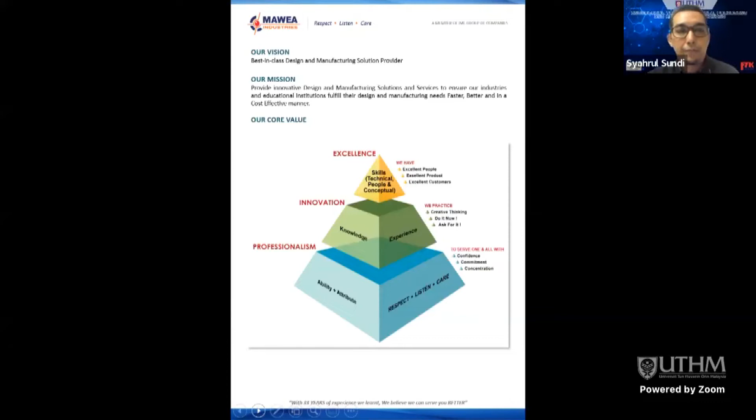So basically this is a rough explanation, a rough briefing about MAWEA Industries.

If you look at the Dassault Systemes partnership in Malaysia, there are a few, another two companies if I'm not mistaken. The difference between MAWEA or IME group and the other two is the appointment of the partnership based on Dassault Systemes, and MAWEA or IME group has held this since 2013.

So that's why even I myself have been dealing with MAWEA for a few years, especially when we have direct programs with MAWEA or with the worldwide company, we also deal with IME. Alright, so that is a brief about the company.

So basically all this solution we can actually browse through Dassault Systemes solution website. So this is the main product, I would say, of CATIA, MAWEA or IME group of companies.

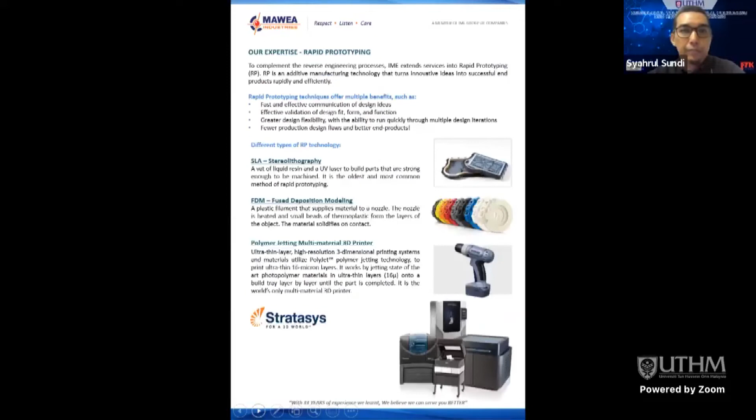Okay, so for today I would like to introduce myself just a little bit, what has been introduced by Mr. Chairperson earlier. So in other words, I'm also a lecturer, one of the faculty at UTeM, FTK-MP, more or less like FTK UTHM.

So more towards engineering technologies, involved in machining and CAD/CAM for the past 11-12 years before this. So alhamdulillah, with this collaboration, hopefully we can have further collaboration later on with FTK UTHM. Alright, just a brief about the topic.

Dr. Khairul mentioned earlier, I won't just go for lecturing, more or less like a sharing. I would say it's more towards sharing. So what we're gonna see.

The real industry experience that I have gained so far, hopefully can boost and inspire some of the students at UTHM to continue their motivation to keep learning, because what we have in the current situation in Malaysia is we are in the implementation, I would say, executor role.

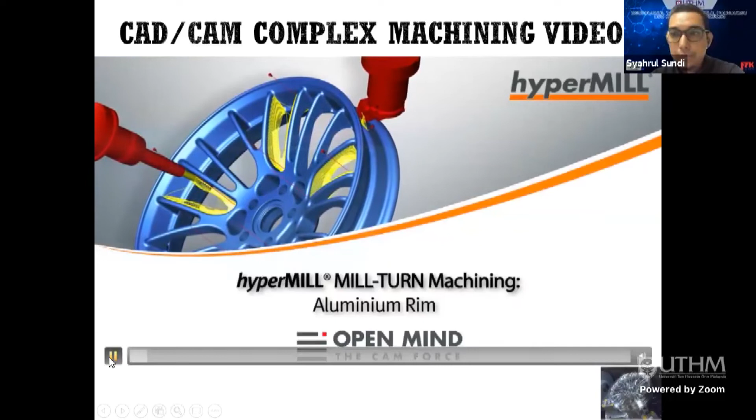Alright, I would like to start with a simple video. Can you hear the sound? Alright, so this is an application of CAD/CAM nowadays, how complex the design can be realistically proven in machining. So let's watch together.

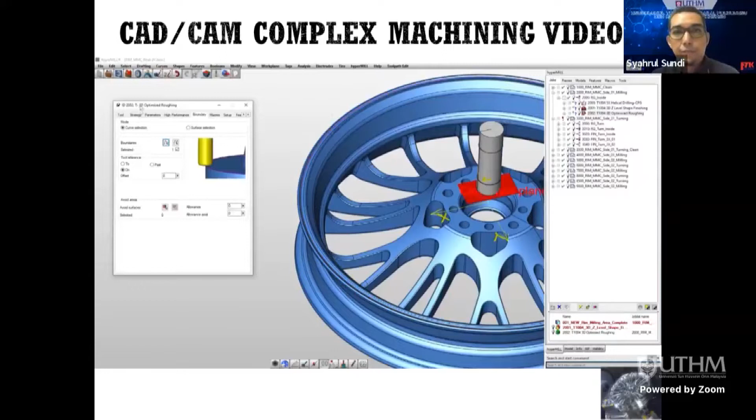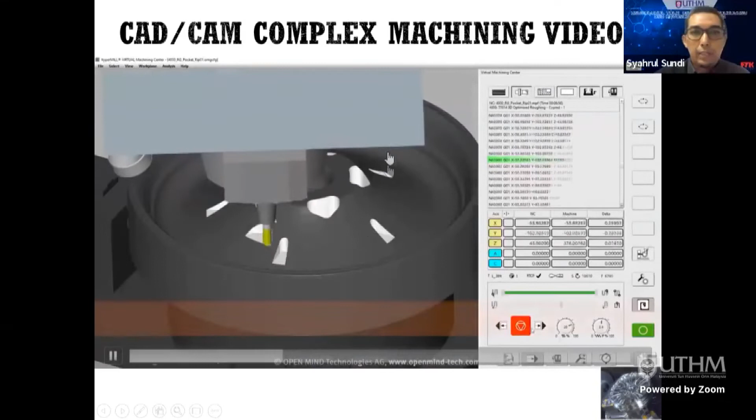He's doing turning now, turning before the 5-axis simultaneous comes in. In turning position, still doing turning with the main spindle which has a turning tool. We're going to the turning control. Right now it's going to proceed with the milling. This is the milling process. And this is simultaneous 5-axis.

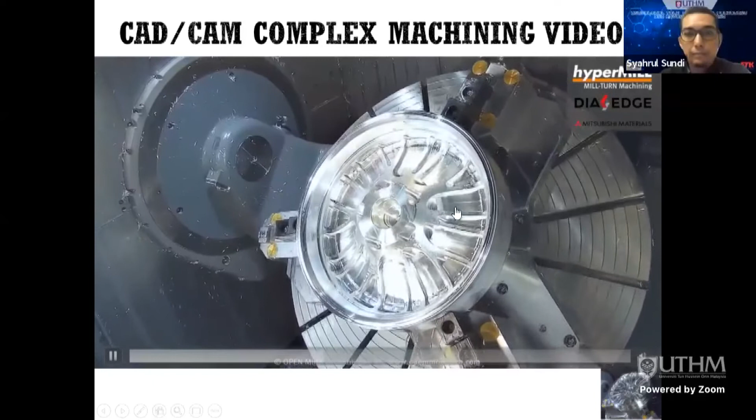Alright, so this is all the G-codes read by the controller. So the controller says okay, this is more or less like semi-finish, and then turn it around for the second pitch on the back side.

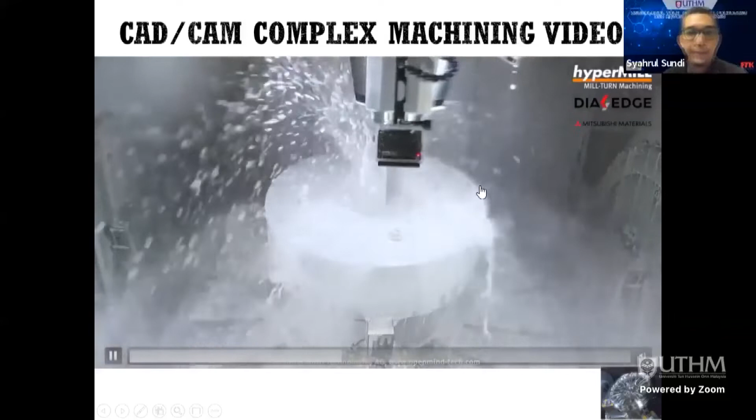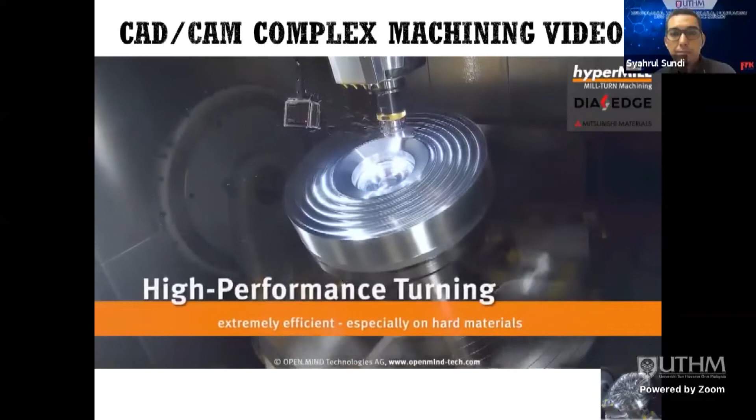Okay, high performance turning. So this is not simple, this is a complex machine. So this is high speed machining of turning on one outside.

Alright, so for those in machining, whoever has a soul for machining, basically we can actually appreciate the beauty of machining this part. It's not easy to machine this complex part. This is the reason why I'm showing this one. Later on I will try to share and explain.

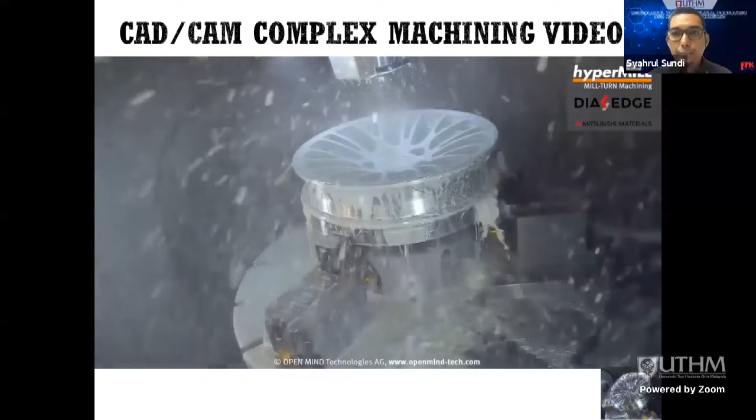Okay, so it's starting to match with the other side. So let's look at the setup and everything. If we set up wrong, it's going to be a total waste of this part. That's why the cutting technology and the cutting planning is very important. Not just on the CAD and CAM alone, but we have to have everything in place before we can proceed with the final machining.

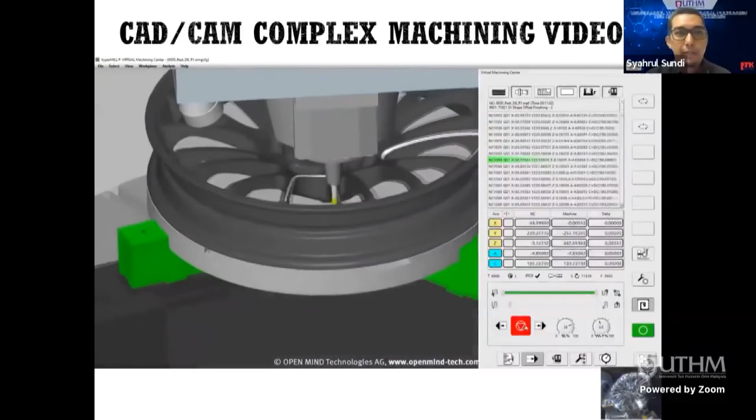This is 3 axis simultaneous turning. Turning, we know, has 2 axes, X and Z. So there's simultaneous turning there. This is 5 axis simultaneous motion. So how can we translate that into real machining? That is the current technology available, which is very important. We have to absorb this kind of technology so that we keep up with the industry.

This is the final part. Gila.

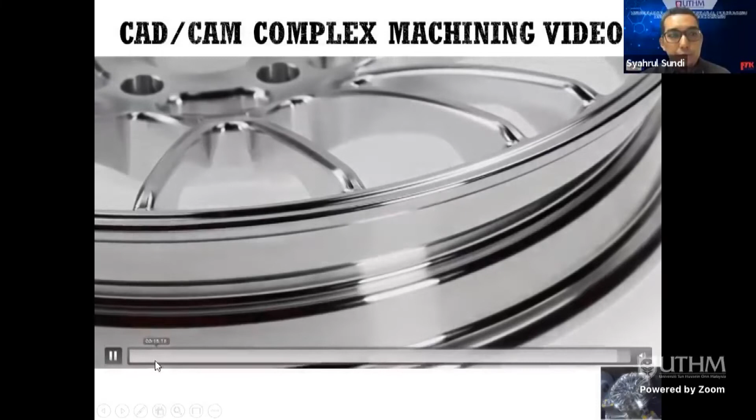Alright, so that will be our brief intro on how CAD/CAM complex machining is involved in the current industry. That is a part of OpenMind, one of the software solutions in the world that's famous, right? OpenMind or hyperMILL is their software.

Okay, let us slowly dive through a little bit - we call this the boring part, but let's go through it a little so later on we can look here and there. Just a sharing from me, so it can help a bit to see the reality out there.

So basically, the CAD system nowadays is very important. No matter what, everything is already involved in CAD. If you really go outside there, we no longer do direct brainstorming with 2D drawings. Most companies out there already use 3D for brainstorming, and it's very important to get to know the CAD system - whatever CAD system you have, the tool is just a tool.

Whether you have SolidWorks in-house, or Inventor, or Catia, there are various software names out there - that's not a problem. The most important thing is how we manipulate, how you can actually use the tool you have to propose or to design, to create a good design. So from the design stage, CAD is very important.

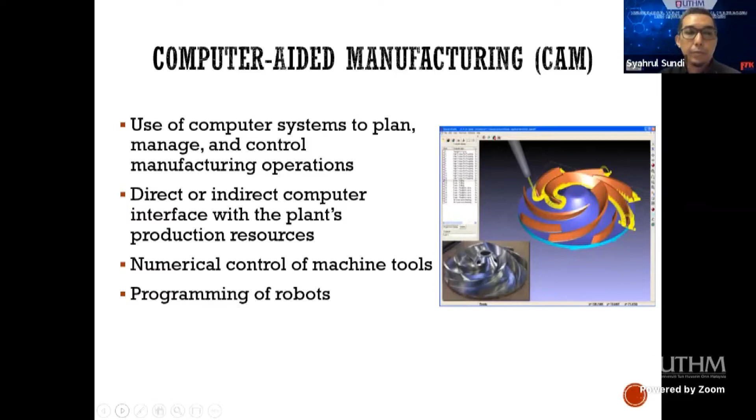So basically kalau kita tengok kat sini, the latest 3D experience product, a new product from Dassault Systèmes, you can have system engineering simulation. So before you do the mock-up atau membuat prototype, semua the system can be embed into the software. So bila buat for example kereta punya simulation, we can actually know from the software itself. So that's how powerful the software nowadays.

Even before this, we have listened to speaker number 1 tadi, Cik Mazlan, also related to CFD, computational fluid dynamics. So it depends on the simulation before you can go into the reality, or else you will actually incur a lot of costs. That's why simulation is very important nowadays. But then the validity, the validation of data from the simulation nowadays is very helpful lah dalam buat certain punya product.

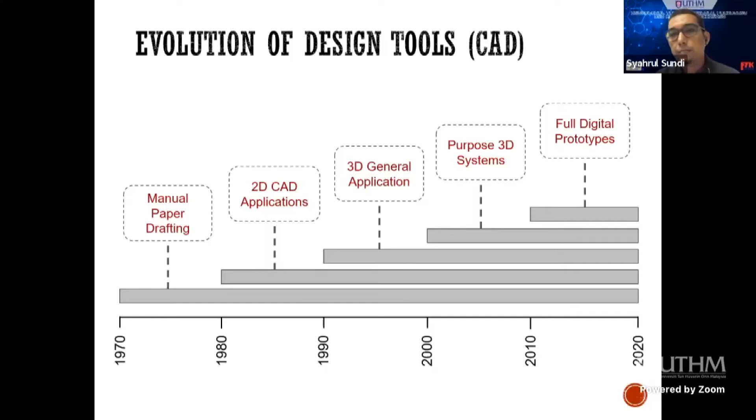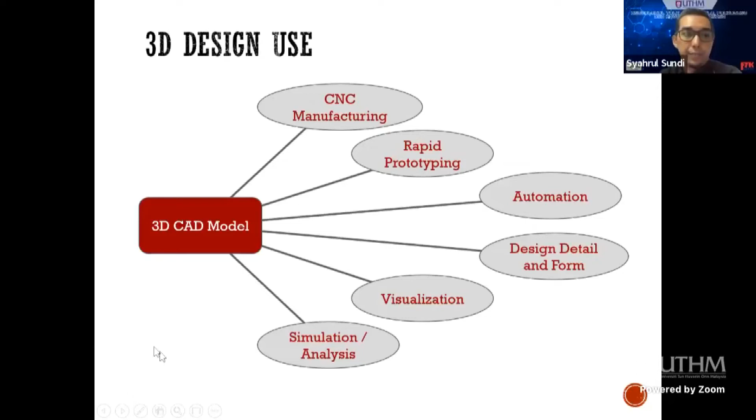So that's why this system is very important. This is downstream benefit, maksudnya pada CNC, rapid prototyping. Nowadays there are various types of rapid prototyping available in the market. Commonly FDM, fused deposition modeling, is famous, and then we have one that's quite complicated and more accurate as compared to the FDM, the SLS, laser sintering rapid prototyping, which has been used by Dyson to validate their prototype or design, adalah SLS method.

Even here we have a few lah, ada yang liquid type, powder type, ada banyak. Semua where it's come from, the source is actually from the design, from the CAD design. And then the system will actually follow apa yang telah kita, what we have created, what we have defined dalam sistem tersebut. So that's going to be akan di-generated by the system.

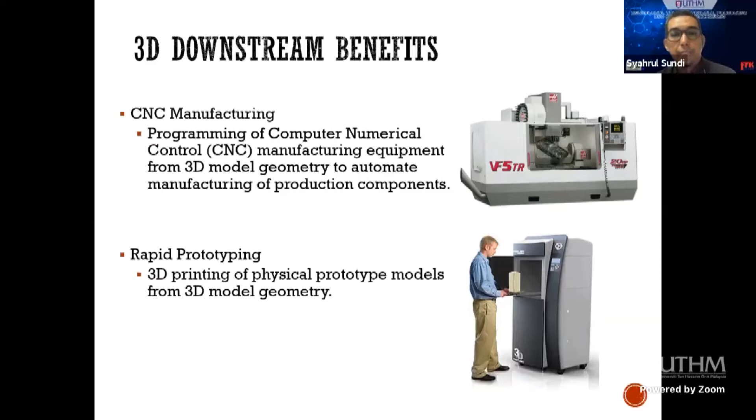Alright, 3D downstream benefit. So ini pun sama juga benefit ataupun the advantage yang kita dapat from the CAD and CAM system. Ada banyak from the CAD system. Simulation analysis like I mentioned just now, kita ada stress analysis, boleh juga buat dynamic analysis, boleh juga buat static analysis. So like what we have mentioned just now, pakai Abaqus. Abaqus is one of the finite element punya software, yang mana ANSYS juga salah satu software untuk finite element. In fact dalam CATIA itself pun kita ada semua yang mana related to it's a complete solution of CAD, CAM and CAE.

Alright, so basically just a brief about machining. Kalau once kita dah ada all those the CAM system, CAD and CAM system, then of course we have to have the knowledge of machining before you jump into the machining. So kena ada this kind of knowledge dulu. Kalau tak, how can you produce a good program? Even kalau kata the axis itself pun you're not well versed, tak begitu tahu tentang axis machine tersebut. So we have to understand the fundamental of the machining first.

So this is partly what we have over here. We always have a normal 3 axis, or mungkin ada yang right hand rules, mungkin ada pakai left hand rules, ada X, Y, Z. Then on top of that, if you have a complex machining, macam mana boleh pergi sampai 9 axis, 7 axis. So it's not actually 7 axis will run simultaneously. So far yang saya involve, tak pernah lagi yang 7 axis tu bergerak dalam satu masa menggunakan satu head.

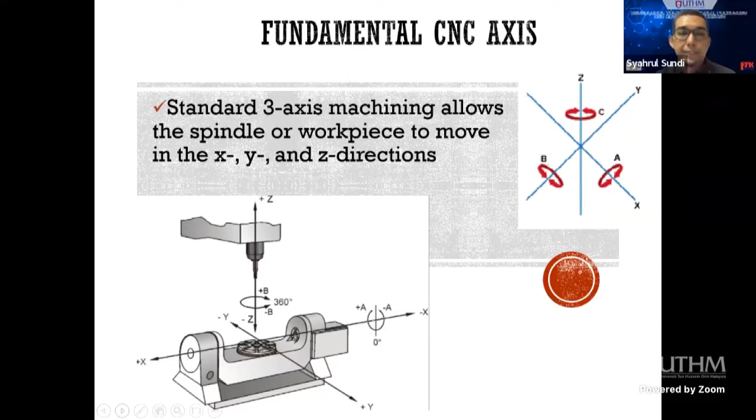So basically this is the axis. We have X, Y, and Z - Europeans call it X, Y, Z - and then we have A, B, C. A, B, C will actually rotate along the X axis, along the Y axis, along the Z axis. So this is a kind of rotation, an additional rotation that gives flexibility. All these rotary axes improve the flexibility of machining.

That's why previously you could only produce a certain micron precision, but now the requirement is getting more stringent. It's smaller and the controllable precision is finer.

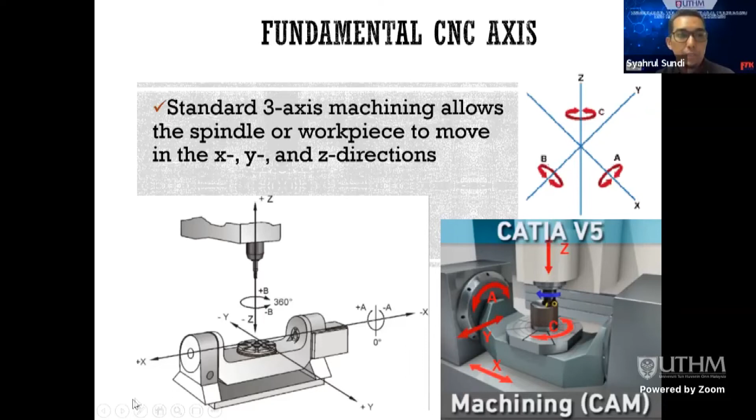I just want to share this. So when we call it 5 axis - later when you go for an interview, for example, have you heard of 5 axis machining before? Ever heard of a 5 axis machine? Oh yes, you've heard of it. So what is the difference between 5 axis and 3 plus 2? 3 plus 2 equals 5 too, and 5 axis is also 5. So what is the difference between these two?

Okay, because especially in our government situation, related to tenders, sometimes there are issues related to this. A 5 axis simultaneous machine is not the same as 3 plus 2. In machining, when we call it 3 plus 2, it means it's not a simultaneous machine. It can move in 5 axes but not in one block. So that particular machine is not able to move 5 axes simultaneously. So the price will be a bit cheaper compared to 5 axis simultaneous. That's the difference.

So in 5 axis complex machining there are 2 types of machines, which is the current demand nowadays. 7, 9 axis and so on are just additional. So when you're talking about simultaneous or multi-axis machining, so far the maximum is 5 axis machining, which can move in 5 axes at one time. That's the difference. So please look into the right machine if you are required to buy a certain machine for your product.

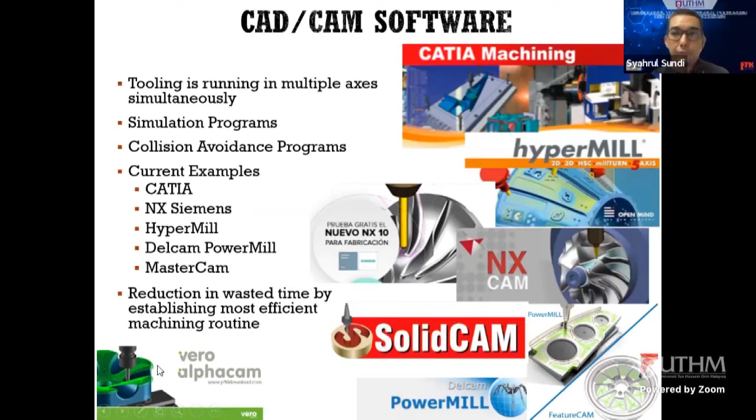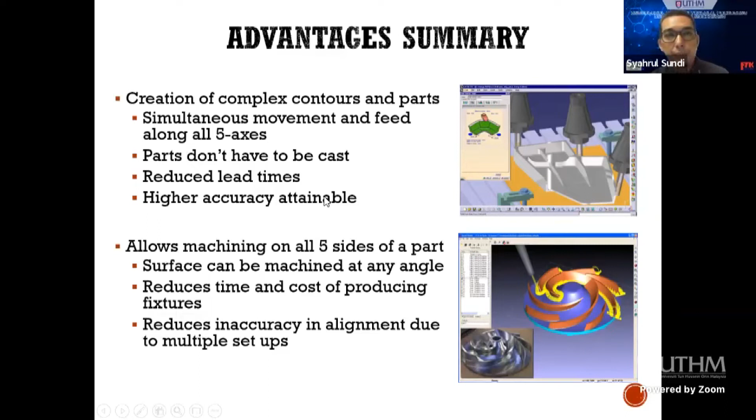This is another one. In terms of finishing, bila ada 5-axis, when the tilting punya motion tu, dia akan, in terms of rigidity of the machining, also will be improved. Ini adalah the advantage of having multiple or multi-axis lah during the machining.

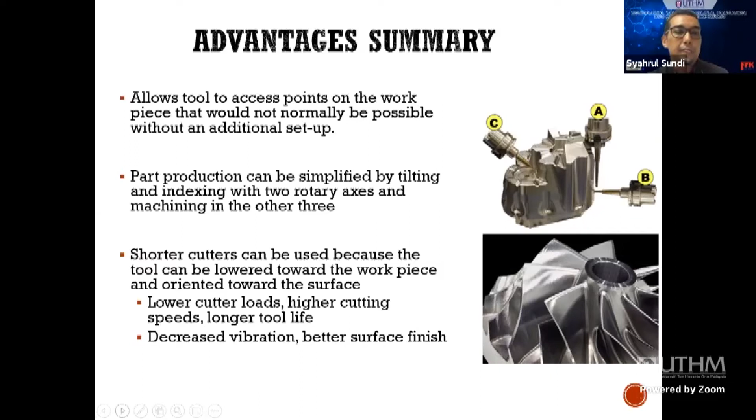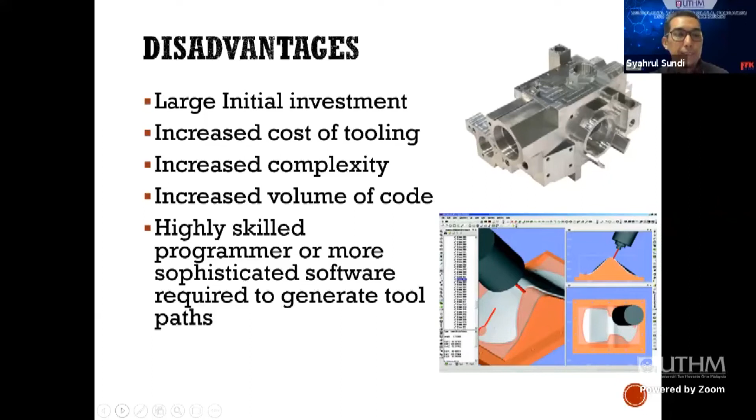Alright, later on I would like to share with all the audience today just a little bit lah apa yang kita dah gone through, especially me and my team in providing this kind of, kita panggil CAD/CAM and advanced machine, especially related to aerospace ni lah. So we are here located very near to the industry, so just surrounded by other industries out there, especially CTRM, Impressive Age. There are few companies, especially precision companies yang ada dekat sini.

So we have, alhamdulillah, managed to conduct a few projects lah dengan diorang. So that's where we gain lah, kita gain sama-sama lah. I mean, before we can actually plow back, or before we actually can share with the students in the reality of the machining. So this is part of it. So ini adalah salah satu project juga, it's what we call a laminate punya, untuk composite laminating punya fixture. So this is fixture, nak kena buat kind of kita panggil trim off lah, skim off nak kena buat. So this is the reality of the machining. So apa yang ada pada CAD system, what you have defined and what we have programmed in the kita panggil CAM system, going to be translated exactly into the machine.

So kalau fail ni, the whole part ni adalah modification, bukan daripada satu block yang kita boleh beli lain. Kalau kita machine from a single block, from a billet, tak ada masalah, boleh beli balik billet tu, 7 series ke 6 series ke, and then kita akan bayar in terms of the cost. Cuma kat sini, if we fail this one, so apa akan jadi, we have to bear the whole cost of producing yang ini.

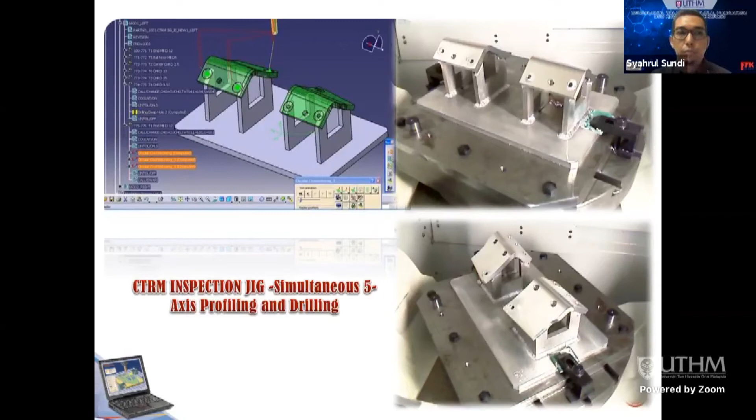Ini juga salah satu, this is from the billet, satu billet yang solid. It's AIDC Taiwan, from Taiwan punya part, memang aerospace dia, it's a door bracket. So ini untuk FAI, first article inspection. So kita machine untuk yang ini.

Cuma kat sini, kalau untuk semua adik-adik yang lihat ni, the expensive part of this one bukan guna CAD/CAM tu. That is part of it, kita boleh belajar. Tapi yang more importantly adalah the technology, the cutting technology. One piece - macam mana the whole block ni, how can you machine the whole block to produce one piece macam ni. So in terms of holding punya technology, that's another issue.

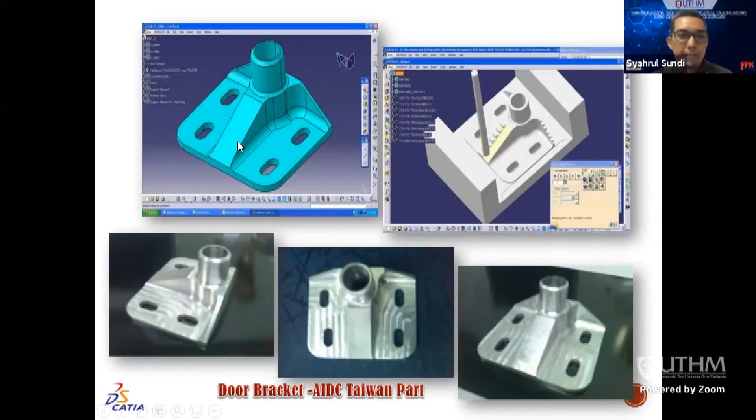Macam mana nak hold this part, and how you can hold this part to ensure that the final part will not bulging ke warping ke. So ini yang adalah teknologi yang mahal, because aerospace part ni kebanyakan semua nipis, semuanya very thin. So this is less than 3mm. Yang bawah ni lagi, it's about 1.7mm saja yang ini. So this area is only 1.7mm.

Why aerospace part dia thin, dia nipis, is because of the weight. So that's why banyak part dia, semua design adalah design yang thin. And then most of the design semuanya complex to be machined. So that's why if you jump into the, kita panggil dalam aerospace punya machining, insyaAllah boleh pergi ke mana-mana punya industri, sebab you have experienced the most difficult part to be machined, dan pergi masuk automotive, dia akan jadi lebih sikit lah, insyaAllah, more or less macam tu lah.

So it's again, kat sini pun saya tak tunjuk, maksudnya this is a part, how can you produce this part from one billet to this. So kena ada the technology, maksudnya cutting technology, macam mana nak hold dia, where you want to machine first, when you want to machine last, where you want to actually leave the material, for example ni tinggal dulu, yang ni yang last, and how to maintain the accuracy.

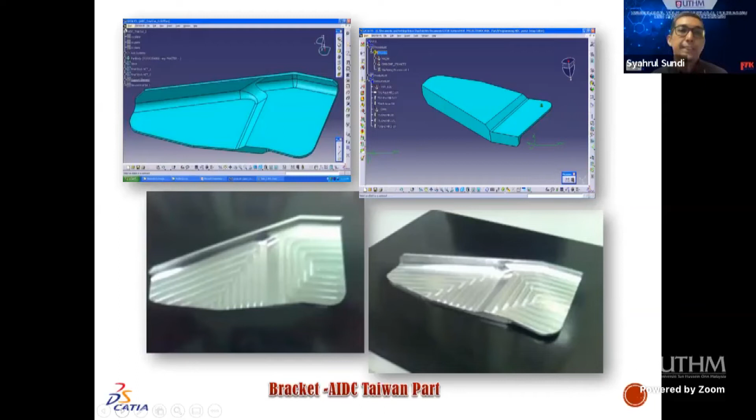Kalau kita pergi sini fail, tak ada maknanya dekat machine yang tadi kena buat lain. Jadi yang paling takut adalah dekat CMM lah. So once CMM result keluar pass, dah boleh celebrate. Lepas machine, tak boleh celebrate lagi. Kena celebrate lepas daripada CMM ni.

Ini adalah contoh, so this is a part from CAD system. This is from the CAM system. And then the actual part given to us siap dengan fixture dekat bawah ni. So it's very useful sebab kita boleh guna benda ni untuk kita fix to the table. So senang sikit nak buat machining. And then apa benda sepatutnya kita buat yang ni.

Ada skim off dalam ni, dia nak turunkan for example like 3mm ke dalam. So kita kena turunkan. Ni pun sama macam case tadi, kalau salah setting, salah semua, the whole piece ni kena ganti balik. Memang itulah boleh, ingat dapat untung kan, last-last rugi juga, bukannya untung. Alright, so itulah, that's the challenge in industry lah.

Ataupun the challenge from kita punya side, especially in education atau in academics kan, kita punya side pun challenge juga untuk kita buat the actual punya industry punya part kan. This is another example yang mana kita invite ataupun kita import everything.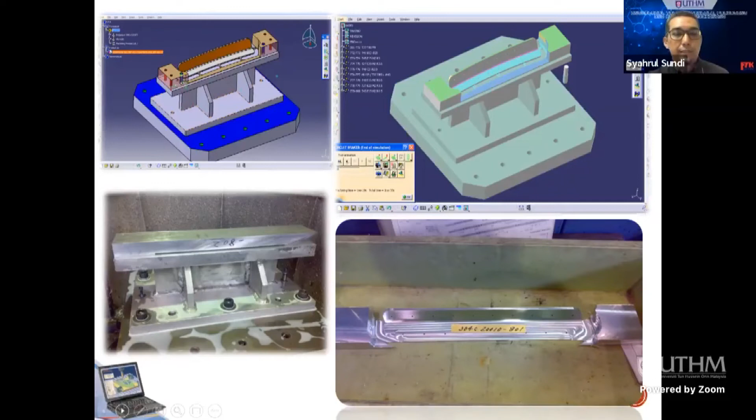So all in all, what I can summarize over here, yang ni yang berlaku dekat aerospace, but having said that, it's actually practicing by every single industries nowadays in Malaysia. Walaupun bukan fully, kita panggil fully implementation of CAD/CAM system, tapi semua dah start pakai. Kalau macam yang company ni, dia lagi orang kata establish kan.

So jadi semua programmer yang akan buat lah. So from the CAD given, so this is the cutting planning. So yang ini adalah CAM. So we have to produce the CAM based on the experience or based on the best practice of machining. So kita akan dapat yang ini.

And for information, this kita panggil top cut ni only left about 1mm. 1mm in the CAM system.

So what happens? So this is what we call it G-code or documentation. So this is documentation that we programmer akan communicate with the machinist. So in certain company, so you are the programmer, you are the machinist.

Kalau company kecil lah. In an established company, for example, company yang besar-besar, especially SAM dekat Penang tepi highway tu, Singapore Aerospace Manufacturing, itu memang split. Programmer memang buat program sahaja, and then you have the machinist to load the program and run the program for you. So in order to have a very clean communication between one to another, so you have to have this kind of documentation. So documentation ni penting lah.

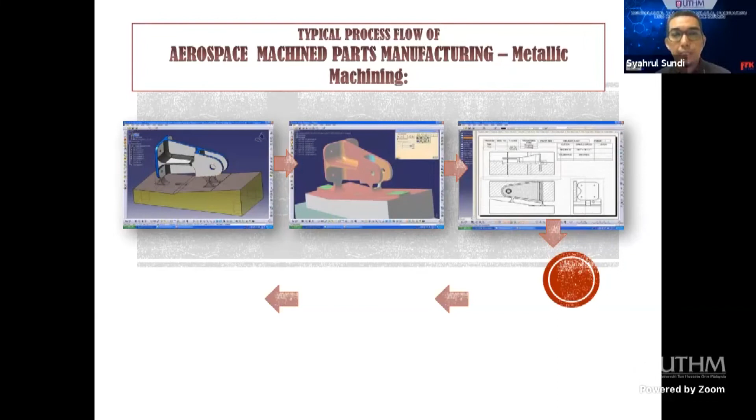And then kita ada simulation. Yang ni buat third party punya simulation. This is another, kita panggil machine verification, dan barulah produce the part. And this part produce exactly yang macam ni lah, 1mm, exactly 1mm. So that is the accuracy we can achieve by today's punya CAD/CAM punya system.

So jangan kita ingat main-main lah dalam CAD/CAM tu. So everything that we put inside there, dia akan translate 99% I would say. Kalau bukan 99.98 lah, 0.02% tu kita leave it to the physics, because physics ada vibration and so on, the cutting tool, everything. So that's why kena be careful lah.

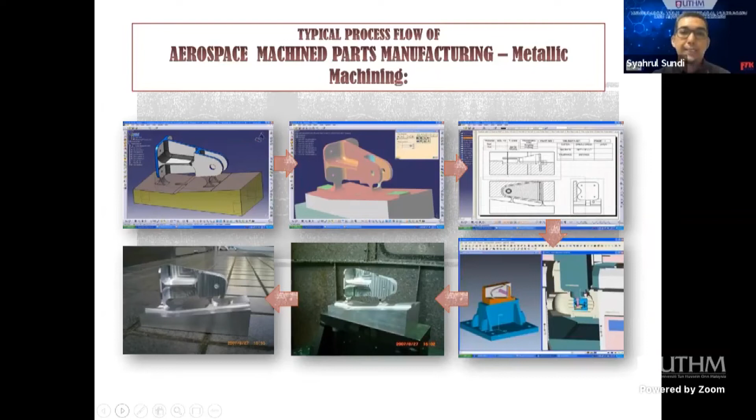So ni antara the recent punya project lah that I have involved with. SMEA before this, yang sama juga. So we have this one. So kita ada yang ini, translate into the CAM, and then this is something different.

Kalau sebelum ni semua tengok CNC semua vertical, but this CNC adalah horizontal. Dia punya head dia melintang, bukan head dia duduk menegak lah. So jadi to program this one slightly different tapi not bad lah.

So ini kita dapat nampak yang kita panggil yang dia punya block lah, the whole block yang macam ni baru nak start roughing ni basically. So ni ada 1, 2, 3, ada 3 lah, 4 yang bahagian atas ni. Dia punya top surface ni.

Ni this is how tak habis lagi ni. Basically it's not finished yet sebab ada lagi this section. Tapi more or less dah nak habis. Final kita akan dapat macam ni. So this is a real Airbus punya part lah.

Ini is just a sharing. Although macam Cik Mazlan kat tadi kan, P&C basically, Private and confidential. Tapi for educational purposes, kita boleh share.

So this is all the drawing that I have involved before this yang with the team lah. So dengan Rolls Royce, I've been involved with Rolls Royce dengan casing engine casing punya part pun pernah. Dengan Airbus, dengan Boeing ni boleh kata banyak dengan yang inilah sebab yang ni yang banyak.

Yang lain pada tu ada Embraer, Bombardier, apa semua lagi lah yang kecil-kecil atau orang kecil-kecil. Yang ini banyak tolong-tolong banyak bantu-bantu all those kita panggil supplier ataupun vendor.

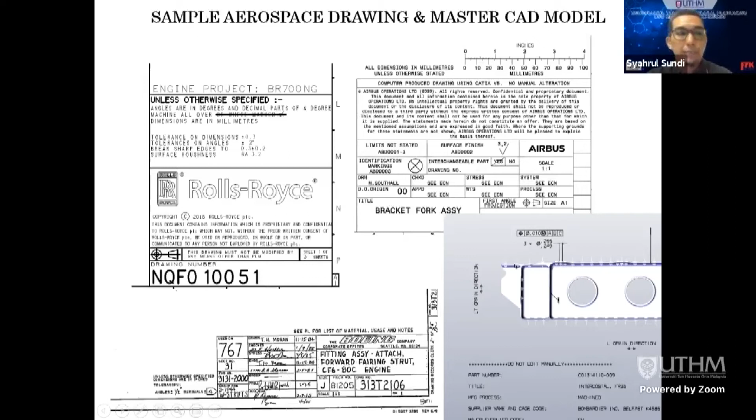Ini salah satu contoh lah. So this is one of the Aerospace Composites Malaysia, ACM. Is a vendor of Boeing. It's been bila ni 2019 sebelum PKP saya sini. So I've been invited to be a speaker untuk ada 24 orang tak salah saya, semua sekali dengan dia punya senior engineer semua ada. Just a sharing macam mana to machine a composite part.

Tadi tu talking about metallic, so this is composite part. Composite part lagi challenging sebab dia punya behavior berbeza. So ini sekadar perkongsian, maksudnya once kita dah gain something, sharing tu buat kita jadi satisfaction.

Ini located far away dekat northern region, dekat Bukit Kayu Hitam. It's a huge company, memang Boeing punya, a joint venture of Boeing company and Hexcel Corporation. It's not a Malaysian company, it's an overseas company. Used to be Malaysian, tapi dah dibeli oleh Boeing dengan Hexcel.

It's an interesting experience, ada beberapa training yang buat dan beberapa project, in fact still ongoing dengan company ni. Boleh lah sebab dia orang pakai CATIA, dalam aerospace ni banyak pakai CATIA, jadi adalah yang boleh kita kongsi-kongsi.

Untuk pengetahuan semua, for the audience, yang machine belakang saya ni, so this is the largest machine, the largest CNC in Malaysia. This is 15 meter CNC machine, paling besar, tak ada lagi yang paling besar. So far yang paling besar dekat CTRM baru 8-10 meter. So this is 15 meter, just recently acquired by them untuk panel 777.

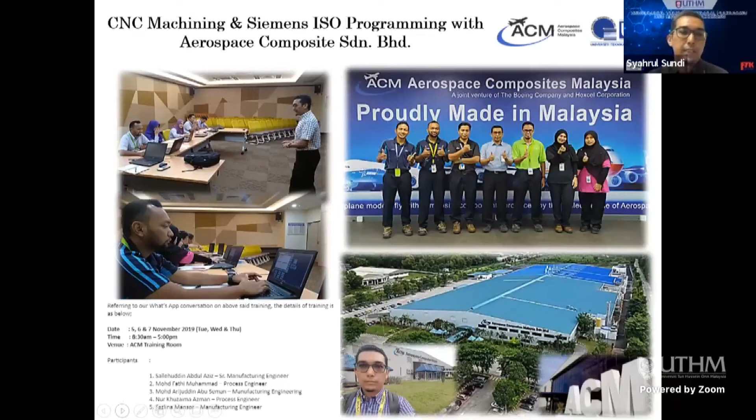Ini another training on the Siemens punya simulation, kita panggil controller. Controller dia banyak pakai Siemens, jadi what I have shared to them is controller punya ni. So this is another machine.

Kalau tengok adalah ni boleh main futsal. Orang dia duduk jauh, kita duduk kat depan ni, so we can actually play futsal inside here. Huge machine, CNC yang besar, dan semua 5 axis, it's all a 5 axis machine.

Ini adalah from CAD system. Whatever things kita translated, kalau tengok semua yang putih-putih ni, semua point-point ni, ini adalah drilling, so this is holes. Involve more than 350 holes dalam satu panel. This is composite panel, so banyak drilling yang berlaku. Kalau kita boleh save satu hole, boleh save 2-3 saat pun, it's meaningful for them untuk improvement.

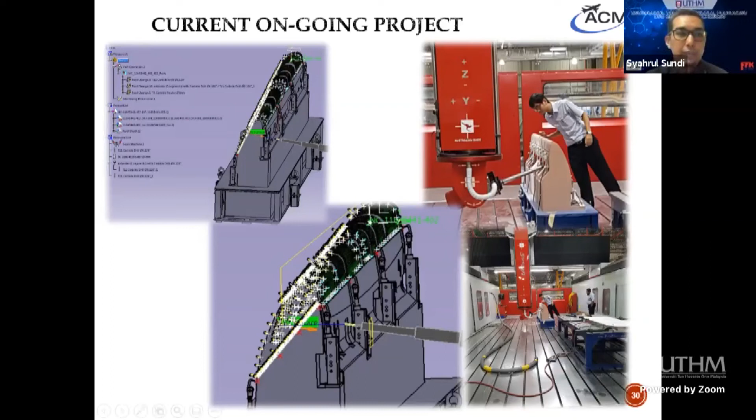Jangan ingat kita tak boleh buat something tau, pergi kilang nanti cuba improve. Even 1 second pun orang berkira, maksudnya something yang ni. Ini yang dengan SMEA, SMEA more to metallic, besar-besar jugalah.

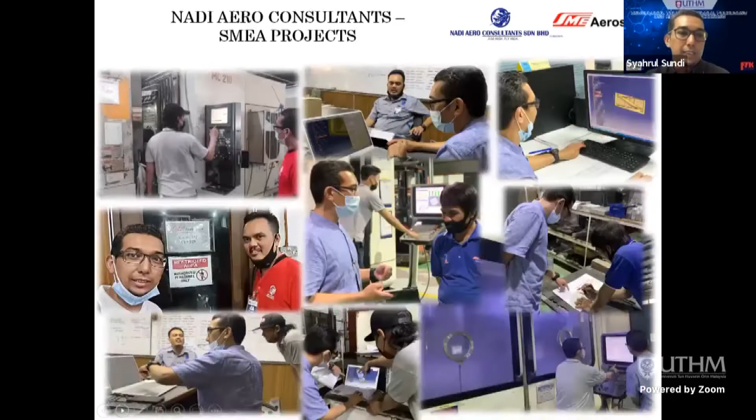Tapi itulah just pengalaman, just kongsi. Kalau tengok sini sampai malam, sampai pagi, ni pun zaman-zaman COVID juga. So pergi sana, involved with the machinist, duduk bincang and so on, dan program. So this is their program, workstation.

Bila dah berlaku tu seronok, tapi time nak jadi tu memang pukul 3 pagi saya tak balik lagi, ni sebenarnya dekat kilang. Ada gambar tunjuk jam, member dah tidur, tunggu lama sangat member dah tidur, saya tak tidur lagi. So part dia besar.

So this is part of the, kita panggil pengalaman, some of the experience. Sebut tak banyak ni, 5 minit je, saya just proceed je, tak banyak ni, just a sharing je.

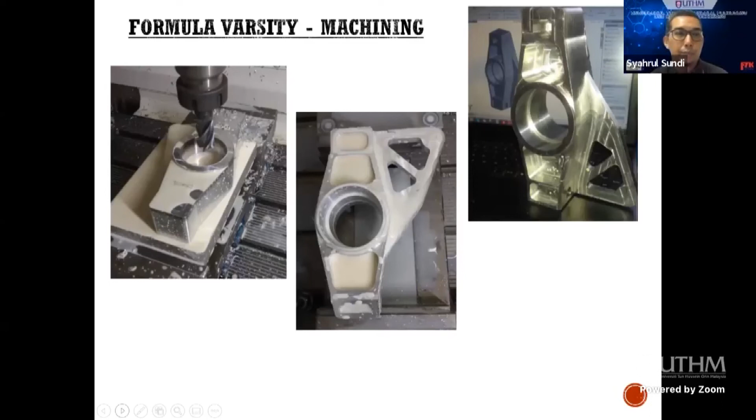Yang ni just an example, kita orang pun as UTHM kita ada juga Formula Varsity, and we produce this in-house, kita panggil knuckle. Knuckle ni dipasang pada kita punya FV, tak tahu bila FV nak ada balik. This is, if I'm not mistaken, last few years back, 2014, 2015 saya tak salah ni.

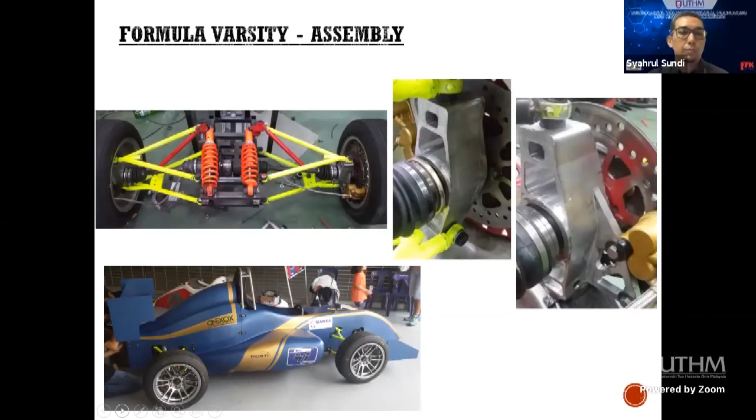Dan sport rim tadi kita tengok sport rim in the YouTube. Basically, alhamdulillah, dengan izin Allah, we have managed to produce our own 16 inci punya sport rim with the project with Mimos. Mimos ada request dengan kita untuk buat this sport rim. This is a real story, saya boleh share.

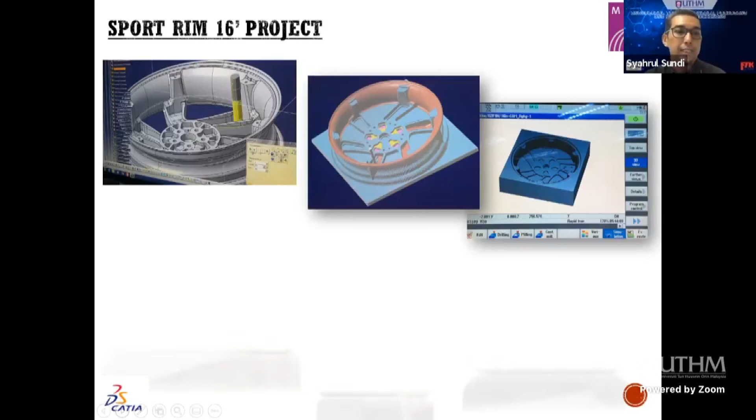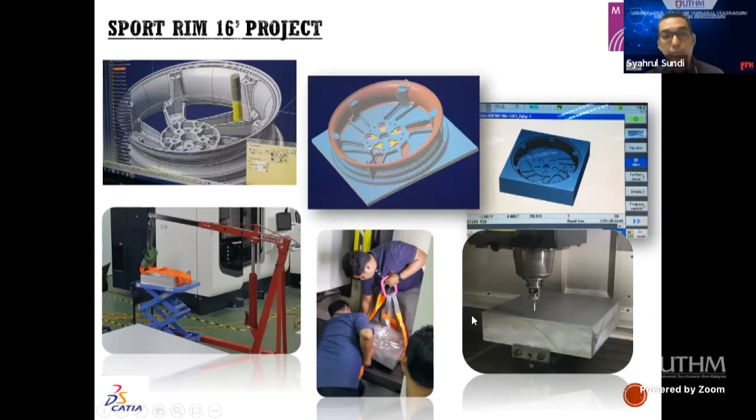So because the lab doesn't have what we call an overhead crane, and then this is what we call the step - we stand by to climb from the bottom, and then we have the roughing process, and this is semi-finish. And although in the video we just watched, that was turn mill or mill turn machine, we managed to produce it using only a 5-axis milling machine, but we improvised a little bit on how to perform turning using a milling process.

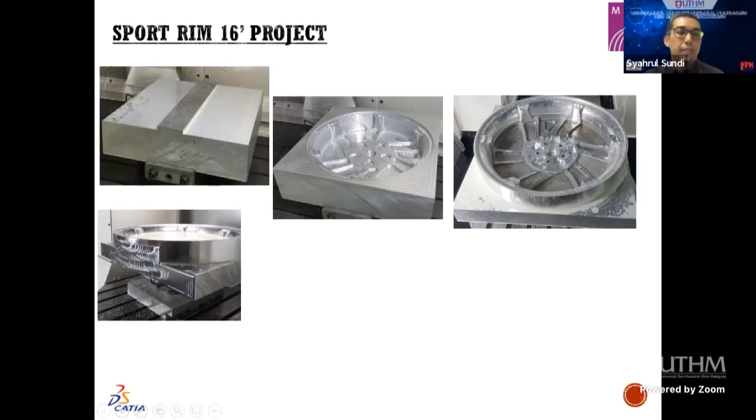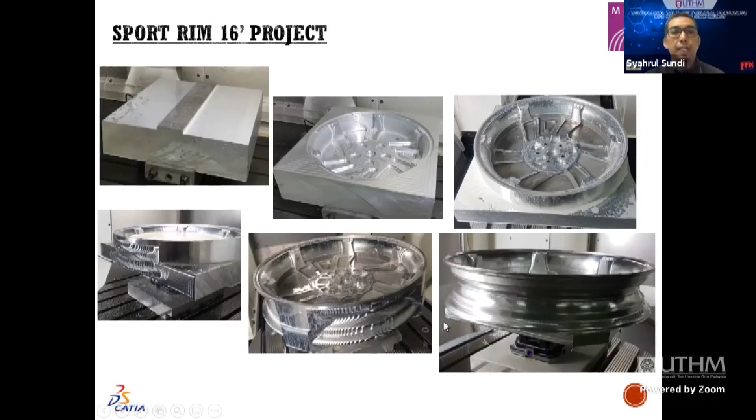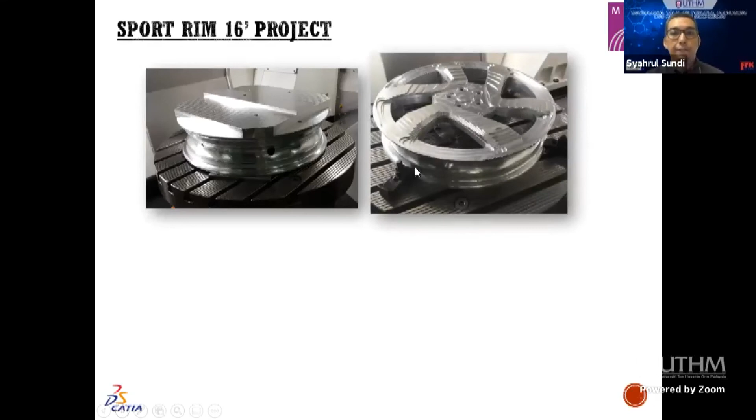How do we do the edges? So we have some secrets before we can get this clean finishing and shiny look. There's a cool video, and then this is a flip over. So once we flip over, we manage this one, and this is very very important, because if we place it wrong and plan it wrong, the whole piece will be scrapped because the back won't match with the top.

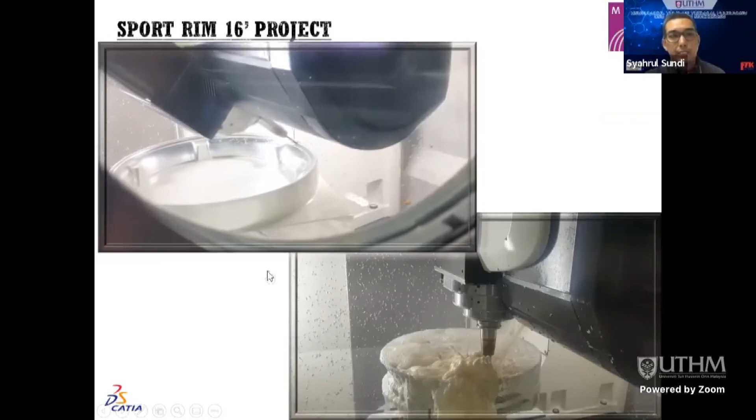So this video is a bit fast - this is the 5-axis motion, simultaneous 5-axis. So below here is during roughing. That one, the very long cut, has something special.

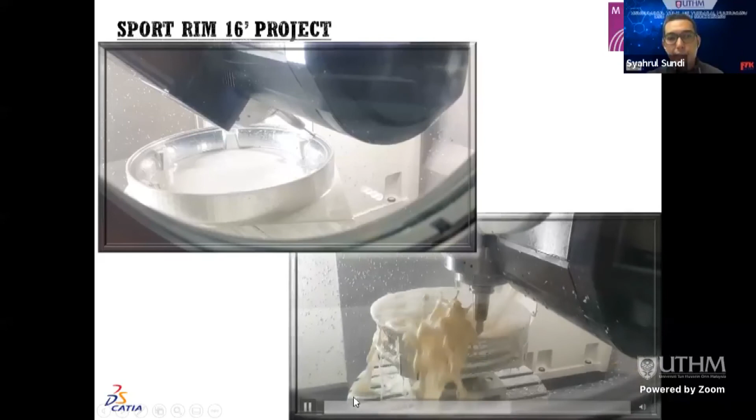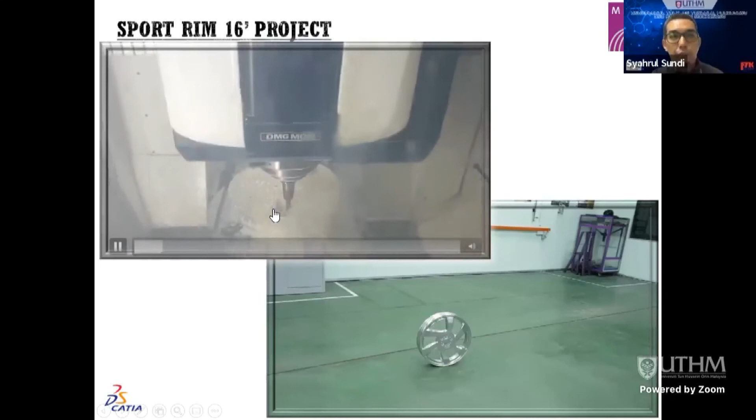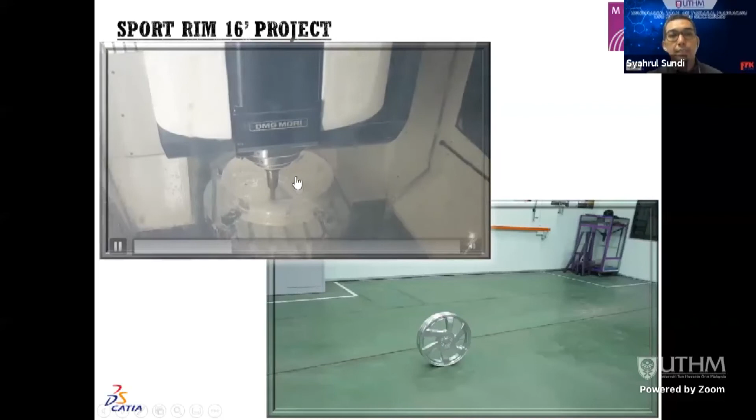So this is the actual machine. This part here is very very important when cutting. Like I mentioned just now, when we flip over to the other side, we need to wait and see if this matches or not. If this one is not matched with the spoke inside, the whole piece will be scrapped. So this is a very important moment. In this case, alhamdulillah, it matched, which means the cutting planning, the setting, the setup and everything was just right.

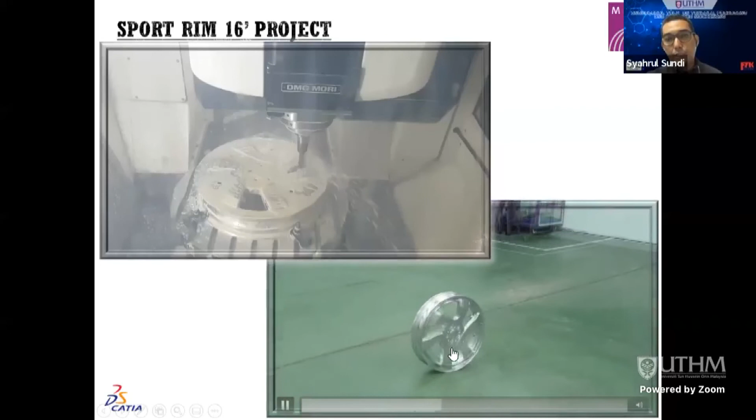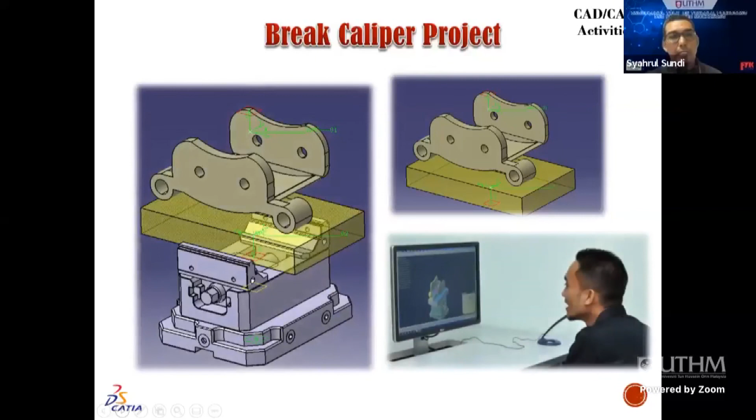Okay, so this is the part, this is the back of the machine. It's a 5-axis machine. Let me just speed through the rest. This is also part of the automotive project - it's a brake caliper, a hard material.

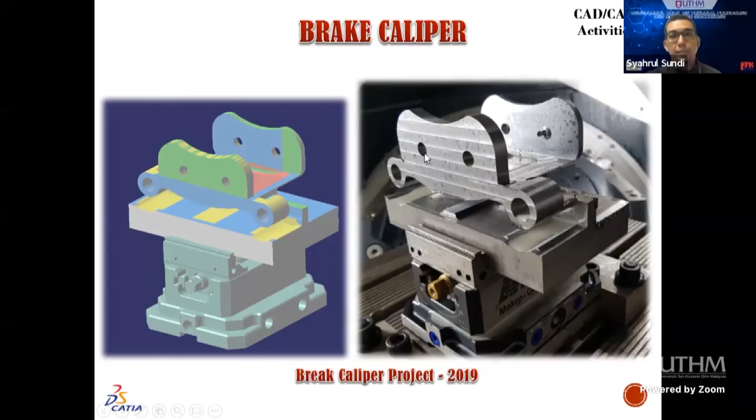Cutting planning is very important. We already scrapped one because of wrong setting - didn't get it last time, and we learned from that mistake. Then finally we produced the actual part.

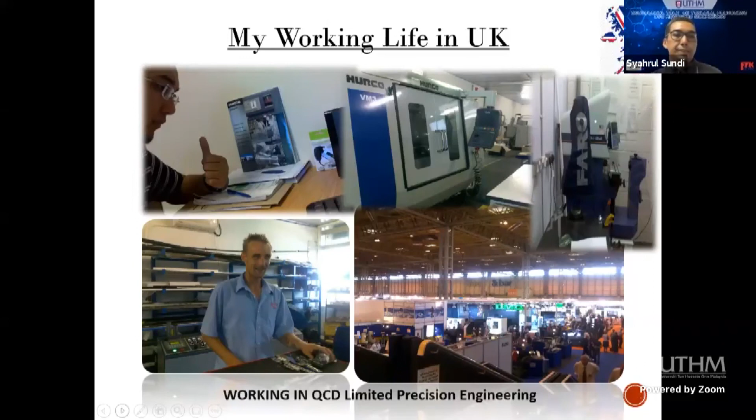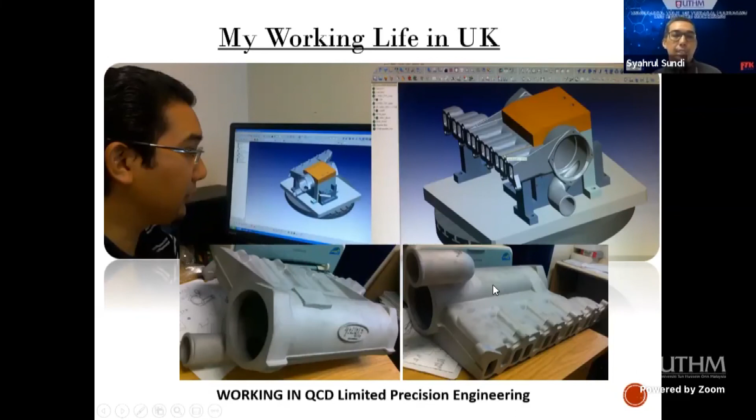This is what I shared earlier - how the cutting planning and the fixture work. You have to design the fixture, and remember this is a casting part, so the accuracy is very hard to control. That's why in order to produce the fixture, you also need a certain kind of technology to be able to use the same one consistently.

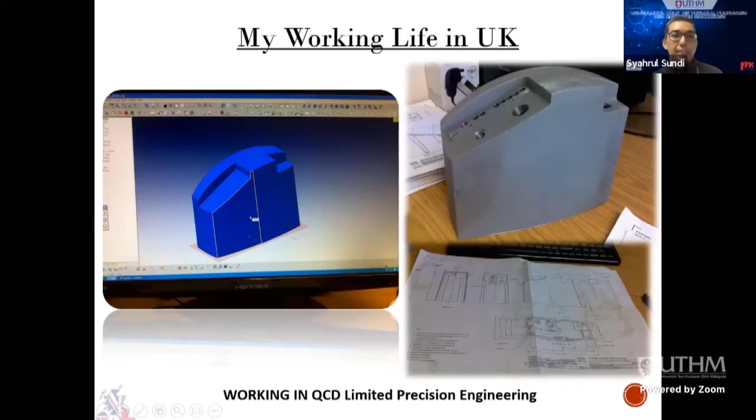This is how to produce from something like this old drawing - they don't have a CAD model. So what I need to do is translate this drawing into a CAD model. Only from the CAD model can we then produce the machining - there's a lot of different work done there. This is also related to machining, and this was my boss during that time.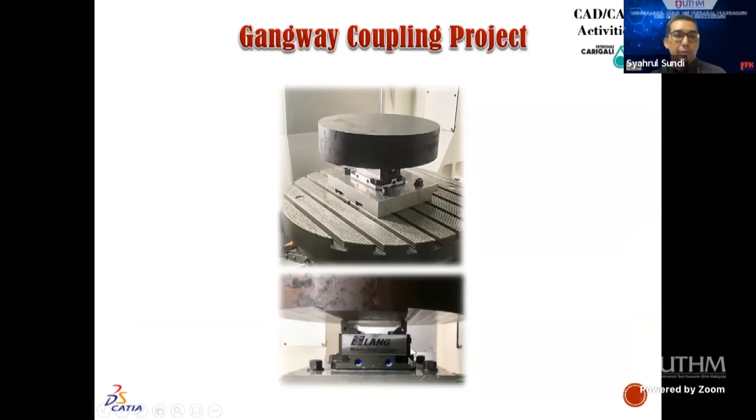This is among a project with Petronas. It's a very hard material, and if you look over here, we only hold 3mm using this Lang technology fixture. This tool is from Germany, and very, very hard material. To rough cut it, six cutting tools broke, not just one. So basically the cutting tool technology is important.

It was our mistake, we used solid when by right we should use insert. The best approach is using insert. So this is from CATIA, this is from Heidenhain simulation, and this is from actual machining. What we can see here is the similarity, the alignment between one and another. In other words, what I'd like to mention is this is important, even in CAM it's important for us to make sure everything translates more or less like 98-99%, like what I mentioned earlier.

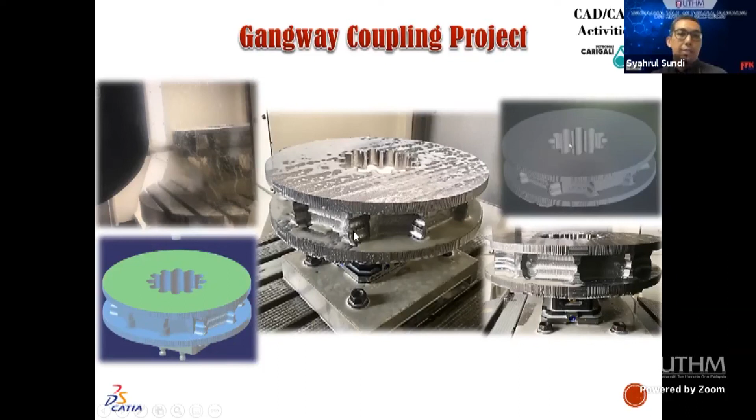This is the same also, the technology that we machine from this site. Just to go to a quick one. It's very slow motion because it's very hard material.

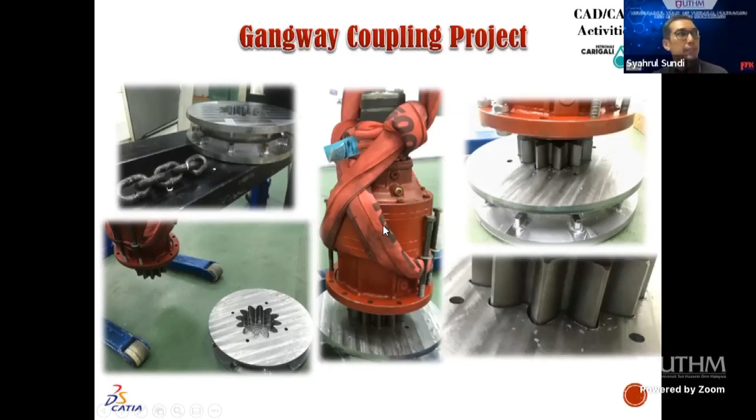This one is something good, we brought the motor and everything inside the lab, and we did what we call pre-validation, validating first before we do the other side. Once we've done the other side, it goes back in, and then we do simulation again, and then finally we do the final finishing, and this is the final assembly.

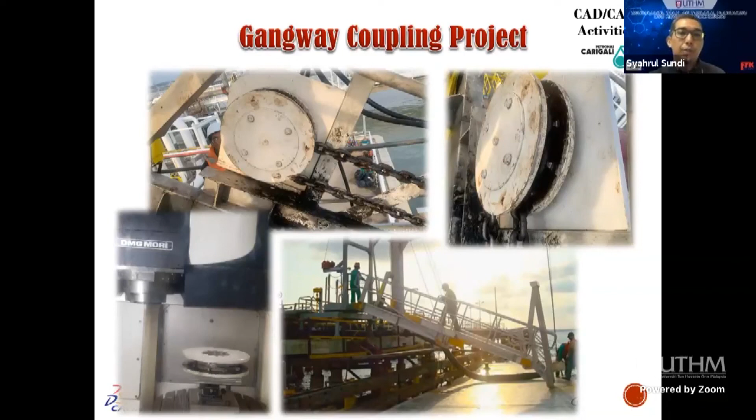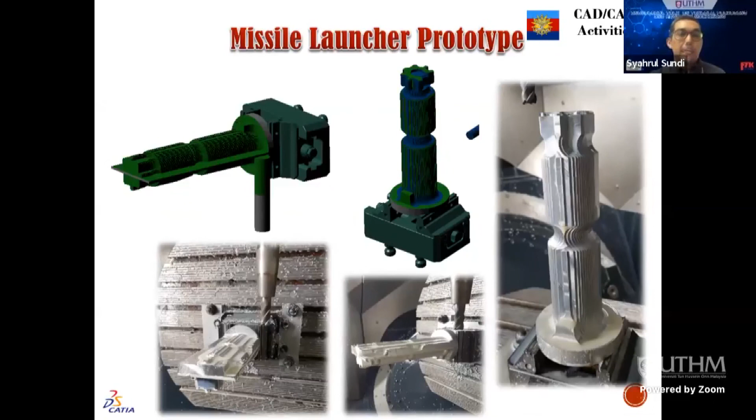This is also part of the sharing, part of the milling, but we also do it like training. This is a rocket launcher. This is a trial for a new design. So this is the machine.

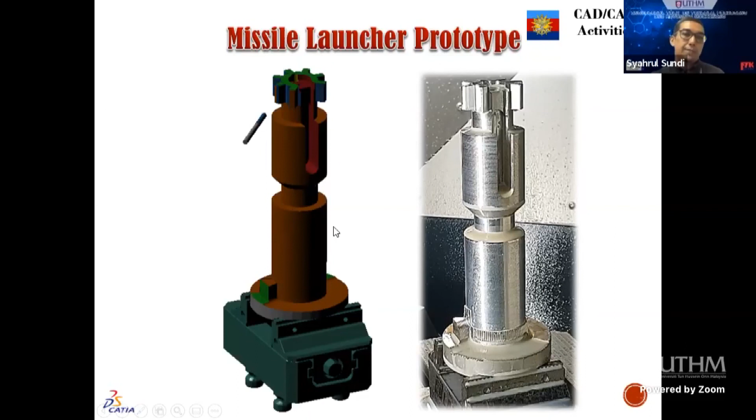I guess that's it. I've gone over time, Syafiq, sorry about that. The rest are just videos. So that's all for me, that's all from myself for today.

Let me try to get the slide back. Is it this one that we have? If you look over here, like I mentioned just now, in CNC there are two types, we call it configuration, machine configuration. We have the vertical type of configuration, and we also have the horizontal type.

Horizontal versus vertical. So in this case, this machine, we call it horizontal CNC machine. The axis will remain the same. If you look over here, this is my axis, so it will stay the same, Y, X and Z. Z is at this position. What's the advantage of having this horizontal as compared to vertical? The main advantage of this kind of machine configuration is with the swarf, or its chips.

The chips will not actually block somewhere around here once we have machined everything. Once we have like 80% material to be removed, for example in aerospace, most aerospace parts have like 70 to 80% material removal. So what we get is, at the end of the machining, the swarf or chips would otherwise accumulate everywhere inside the machine. That's why with this kind of configuration, you have a clean cut without any obstruction from the chips. This is one of the advantages of this kind of machine. That's why it sits in this kind of position. Okay, am I answering the question?